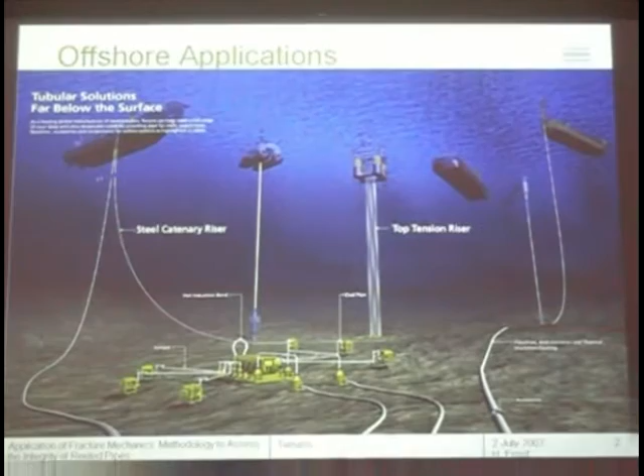I don't want to give you a crash course on petroleum engineering, but maybe for some of you this is something you've seen before. These are not birds, but ships floating on the surface of the ocean. This is the seabed, and basically there is oil down here that you need to bring up all the way to the surface. Sometimes you have a distance of about 2,000 meters, so you have to bring down all kinds of line pipes.

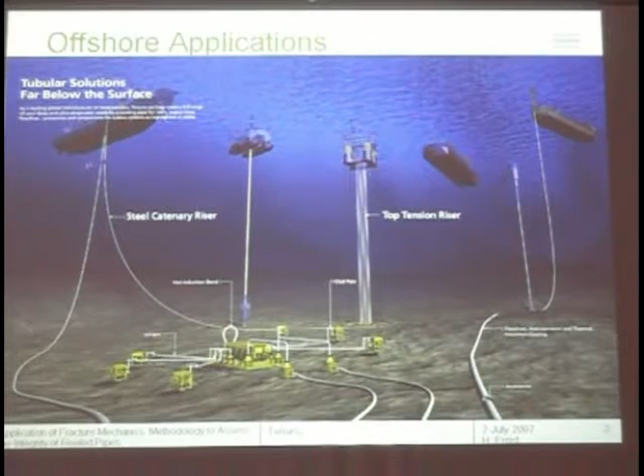One of the ways to do that is to use the so-called reeling process of installation. In this way, pipes are welded onshore, reeled onto a drum placed in a reel ship, reeled off, aligned, and straightened at the installation place, and of course we see severe plastic deformation and multiple reeling cycles.

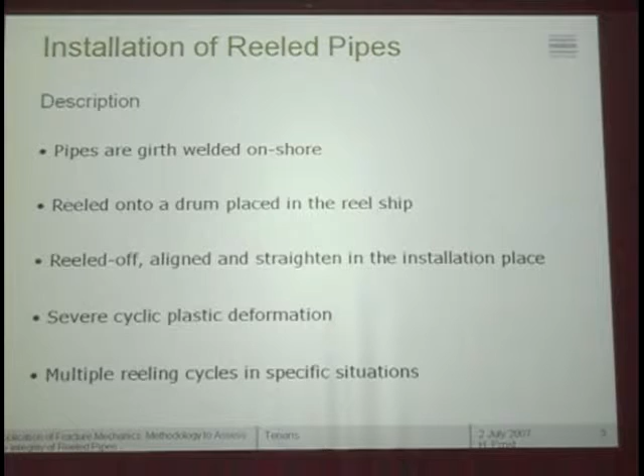Just to give you a very brief sketch here, this is the ship, this is the drum. You put the welded pipes inside this drum, which is about 16 meters in diameter, and then when you are at sea already, you derail or dereel the pipe, straighten it a bit, go through this other wheel, and then straighten it and make the pipe go into the ocean.

The reason why we develop this technology to weld the pipe and put it around a drum like this, which is not very easy to imagine unless you've seen it, is a very simple thing. The other way to do that is to take all the pipes inside your ship, have a vertical tower, and put one pipe after the next, welding them one after the other about 200 times to get to the bottom of the ocean.

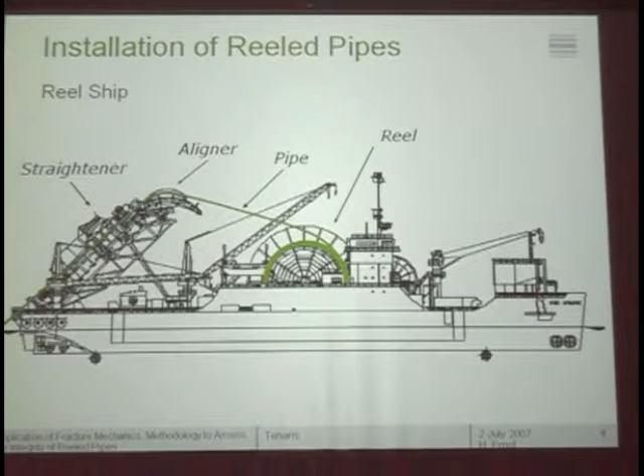One little problem is the rental of this ship is about 400,000 euros a day. So anything you have to do to speed this up is very important. Because of that, people do all the operations I just mentioned of reeling these pipes.

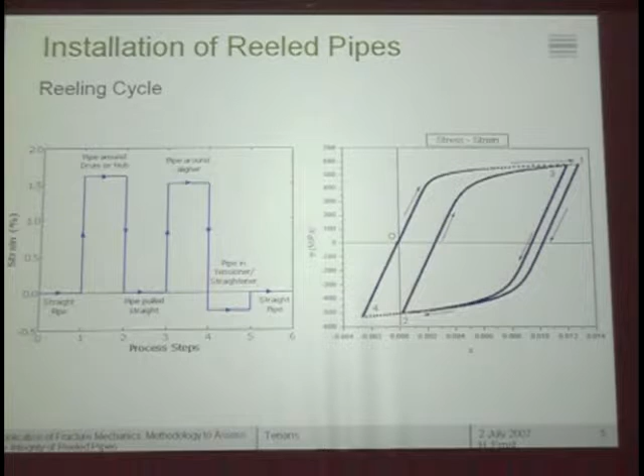If you look at the little element on the pipe, the longitudinal strain that little piece of material will see is, say, 0 first. When you put the pipe around the drum, you have a deformation of about 1.5 to 2%. Down to 0 again, you pull the pipe straight, go up to the second wheel, the aligner as we call it, a little less than 1.5, come down to about minus 0.1 or so to have the pipe finally straight again. If you look at the stress-strain curve of this, it will go from 0 to point 1, then to point 2, then point 3, and then point 4. So basically we are seeing 2 deformation cycles under normal operations that the material has to see.

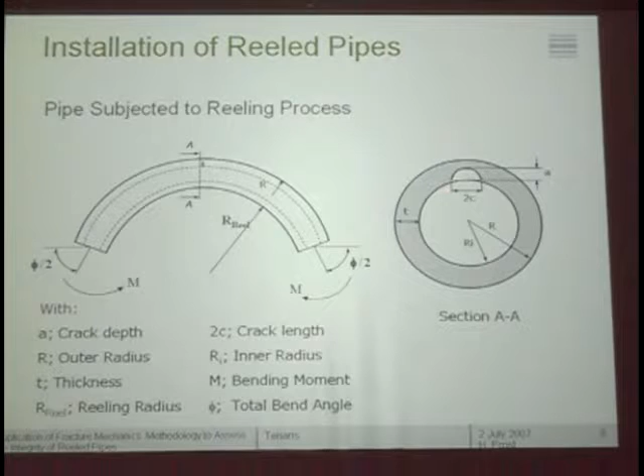Well, this is just a sketch, just to know where we are. This is the pipe, of course, and this is a defect that we will have to introduce there, of depth A and total length on the surface 2C.

So the problem that we have to resolve is: given the pipe geometry (radius, thickness, and so on), material properties, and a specific deformation history including several cycles - I repeat several because I showed you just 2, but there is a so-called contingency installation procedure. That is, if you already have the pipe in the ocean, maybe there are some bad weather conditions, so you have to retrieve the line through the 2 wheels back again, which puts not just 2 deformation cycles, but several - not that many, say about 10 to 12, no more than that, but still much more than 2. Basically, this is the problem.

That's it. What we need to do is simply predict the crack extension that you will see for a given defect size, and from there determine the maximum tolerable defect size.

Of course, we have to give some sensitivity of the answer to material variability. And as I said, we must answer this in some way, to do the best we can to come up with the maximum tolerable defect size.

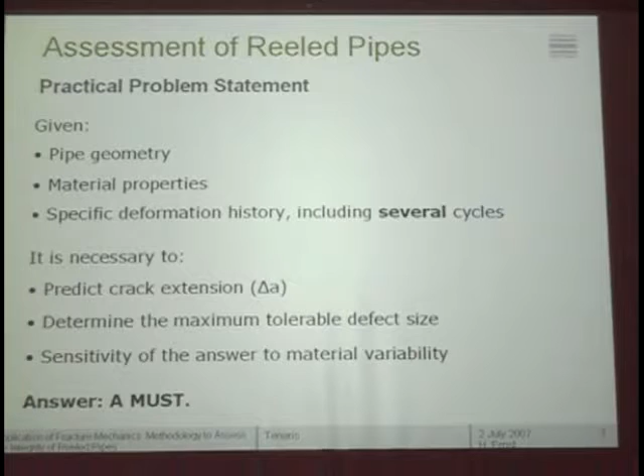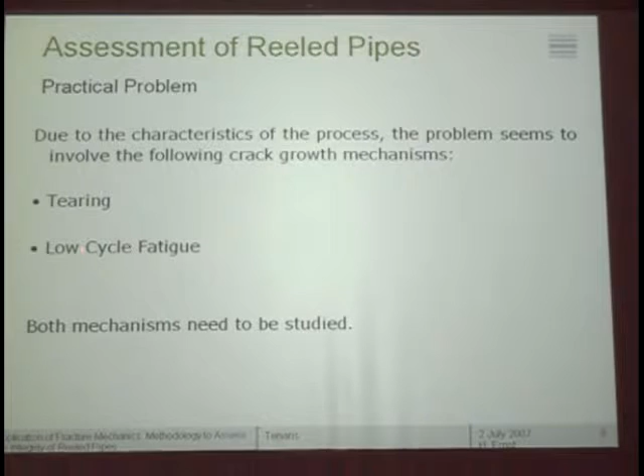This is what I'm going to show you. This is work we have been doing for some years now, and of course some other investigators are on the same problem. Basically, looking at the problem, there are two aspects that need to be considered. You will have some elastic plastic crack extension, and you also have low cycle or ultra low cycle fatigue, and you have to see a combination of both. Both mechanisms need to be studied.

Well, just to start very slowly, one sentence that you see very often in the literature, which we believe is a little misleading and mistreated and misused sometimes, and needs careful consideration, is this: the effect of previous strain history on toughness.

This is what we mean by that. We must differentiate between deforming a body, introducing a crack, and then determining the fracture toughness, which is what you usually find in the literature, from what is happening here, which is something different. That is, if you have a crack from the beginning, impose a certain deformation, and then another cycle of deformation, and see how the toughness evolves with the previous deformation. So it's not the same, and that means that many of the literature results you can find are not really applicable to this problem.

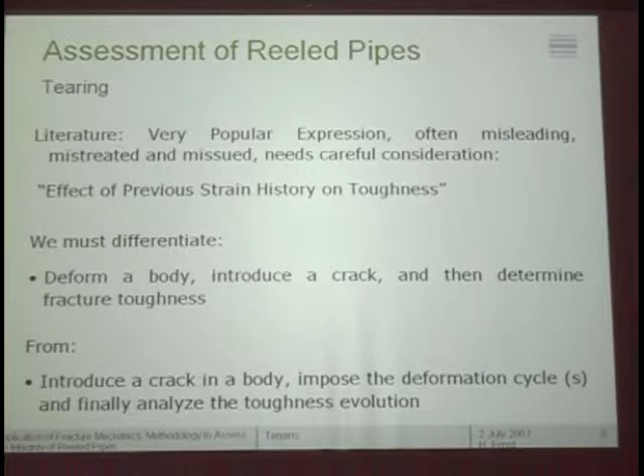The problem we need to address is the obvious fact that the stress-strain relationship is not unique in the sense of unloading. The applied fracture mechanics parameters are not clearly defined. Of course, the J integral, the applied side of J, loses its meaning, as we all know, for unloading cases. And in some way, both the applied J and some kind of applied CTOD, delta appl, are not clearly defined in the sense of the applied side for calculation purposes.

That is, if you have J as a function of crack length and load, or J as a function of crack length and displacement, they both must agree. In this case, since the load-displacement or stress-strain characteristic is not clearly defined, because it's not unique, then you cannot use the regular equations to do that.

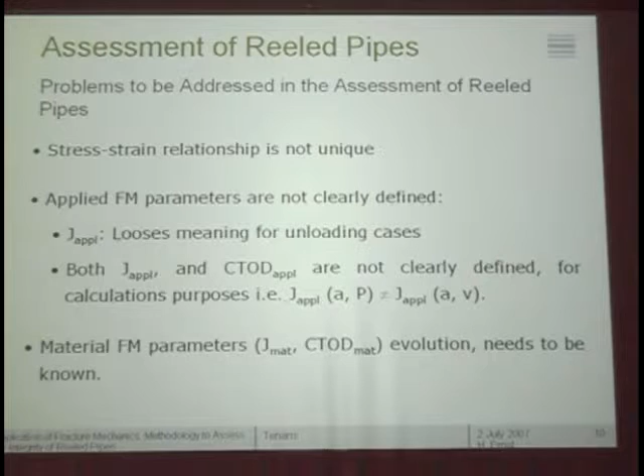Of course, we also need to see how the material resistance curve, which we call material fracture mechanics, J or CTOD versus delta A, evolves. That needs to be known, as I said again, instead of the sentence that I mentioned before.

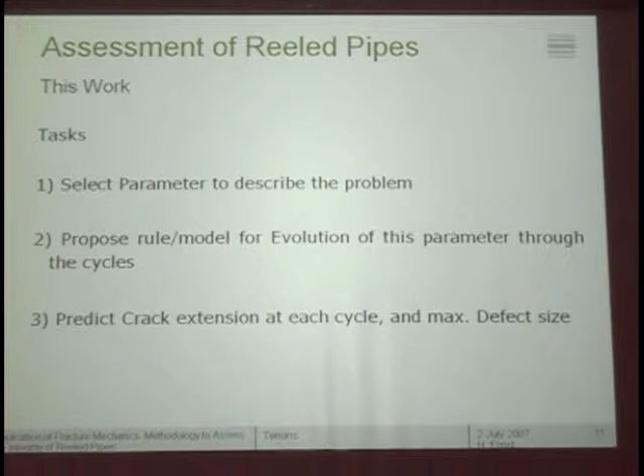The task then that we need to go through is basically to select a parameter to describe the problem, propose a rule or model for the evolution of these parameters through the cycles, and then predict the crack extension at each cycle and determine the maximum defect size.

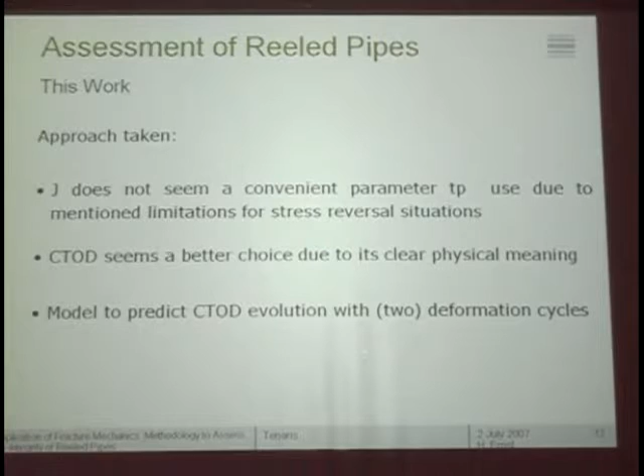In this approach, we feel that J does not seem very convenient because of the limitations we discussed. So we are focusing on what we call a CTOD approach, because it seems to be a better choice due to its clear physical meaning upon unloading criteria. So at least we need a model to predict the evolution of the CTOD with deformation cycles, in principle, but we will see how we can add several steps to this.

In order to do that, we went back to the literature, and of course, who else? We found some very old paper by Rice, 1967, where it was basically proposed that you can do something with the unloading for a specific material constitutive equation, the kinematic hardening approach.

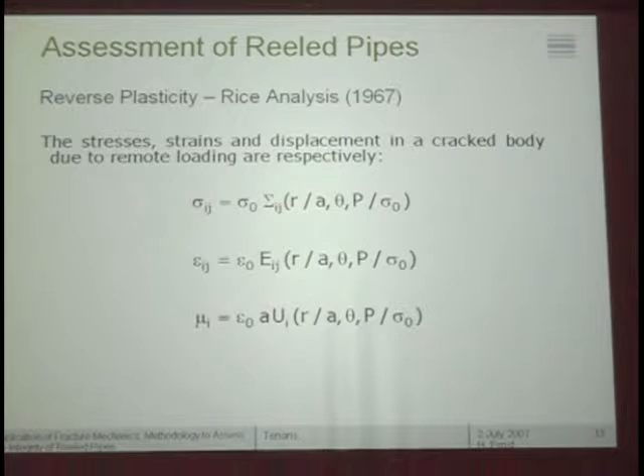If you have around the crack tip stresses, strains, and displacement given by some functional dependence like this, sigma 0 and some function of R, distance over A, angle, load, and yield, and so on for the rest, he proposed that if we were to unload from some load A to a load B, we will see then that the sigmas will be decreased by delta sigma, the epsilon by delta epsilon, the displacement mu by delta mu, in a way that the functional dependence will be the same as before, except that you should replace the loads by delta loads everywhere. Also, if we are using this kinematic hardening, the simple rule of multiplying mu by 2 will do.

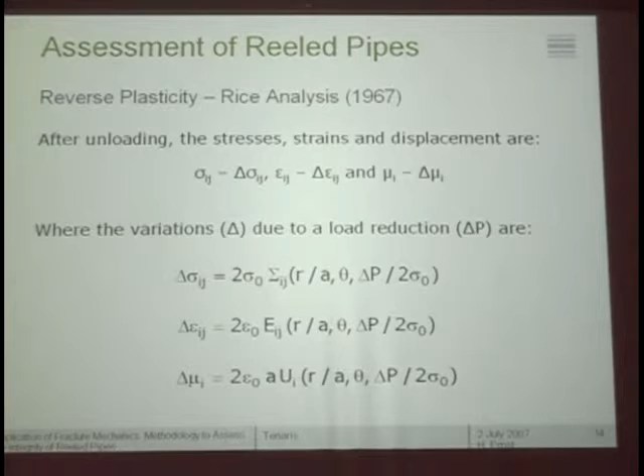So with that, you are able to calculate the stresses, strains, and displacement after unloading. And of course, one particular displacement we are interested in is the CTOD itself, which can be seen as mu2, taken at R equals CTOD over 2.

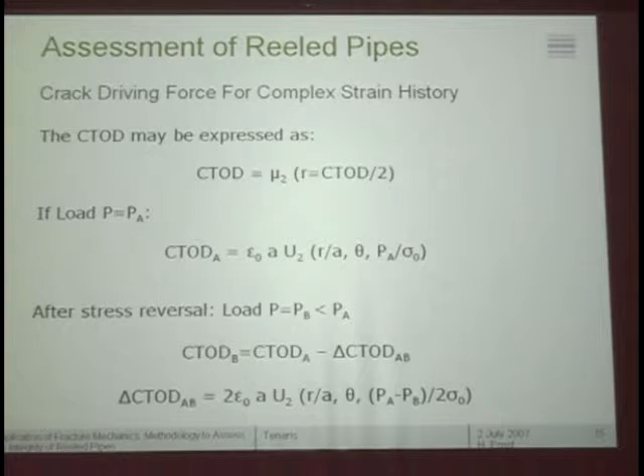So with that, what we say is that if we have a CTOD at load A, given by this type of relationship, when we go after stress reversal from a load A to a load B lower than A, it's very simple to calculate the CTOD at that point by taking the CTOD at A and reducing it by this amount delta CTOD going from A to B, which is given by this relationship.

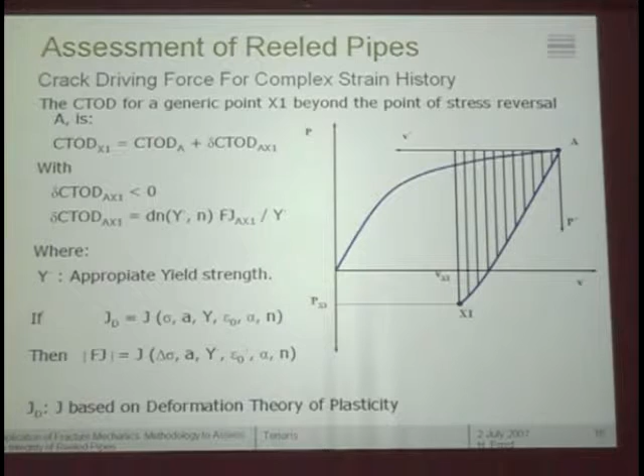If you're basing your CTOD on a J type of formula, you simply need to calculate the area here, and that will give you a J, which is not quite a J, but you can translate that to the CTOD on a regular basis. Let me explain in more detail, but this is basically the same.

And then, of course, if we reload, we do the same thing again. For the CTOD at point x2, you will have to have the CTOD at point B and add the difference, the delta CTOD going from B to X2, and you repeat the same operation.

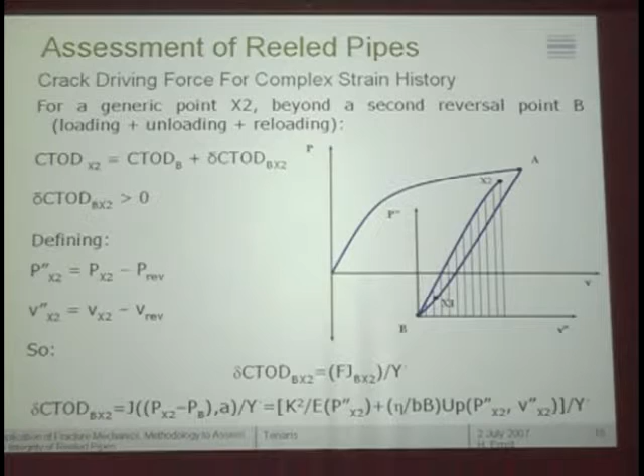So with this very simple model, we thought we were in a position to predict this evolution of the CTOD to a practical extent, of course. To prove if we were right, or close to, or right enough for this purpose, we did some experimental work to determine the evolution of the crack driving force, no crack growth so far, under complex strain history. We took a particular material, one of the ones we use for this operation.

The tube is 355.4 by 22.2 millimeters. The yield is 476 megapascal, the tensile is 565, elongation about 33%. And the weld metal - remember this is a weld piece - 552, 672, and 32 about.

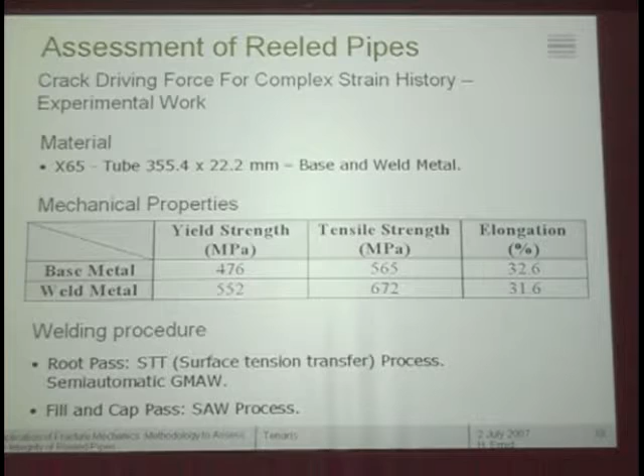These are some details of the welding procedure. I don't want to go too much into detail because we have a lot to cover. What we did is use the very commonly used single-edge notch tension specimens recommended by the standards for this type of thing. The reason is it simulates, or supposedly simulates, the constraint - there was some question about constraint before. It's believed that the single-edge notch tension specimen simulates the Q factor, if you want to use two-factor fracture mechanics approach. It simulates pretty decently the behavior of the pipe, the pipe in bending.

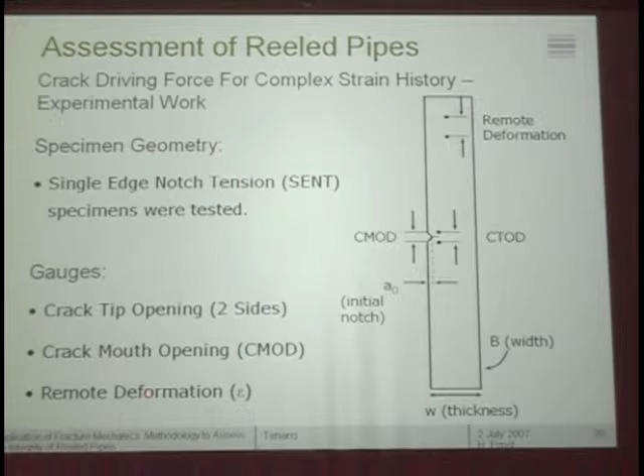So this is the same specimen. We measure the CMOD there, we measure a CTOD that is very close to delta 5 because we actually measure the distance between two points from both sides, and of course we also measure the remote deformation.

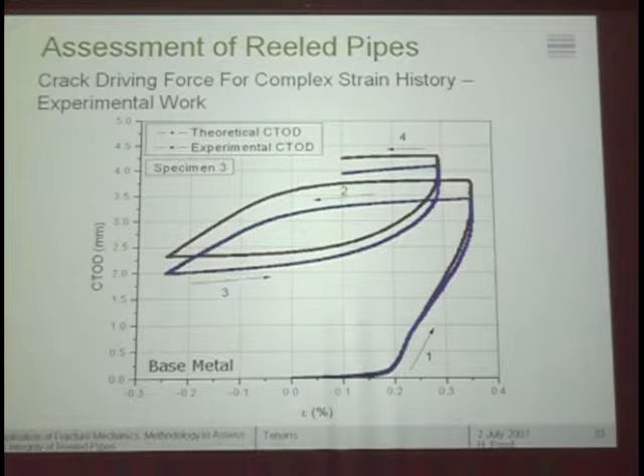So now, applying the model I just mentioned, this is the type of agreement we have. In blue, as shown before, experimental results. In red, this model we just presented. The difference is there, but it's not so bad. In fact, we are pretty happy, particularly given the problem I mentioned before. In both cases, there is some extra elongation in terms of CTOD that should not be there, so we feel pretty comfortable with this type of agreement.

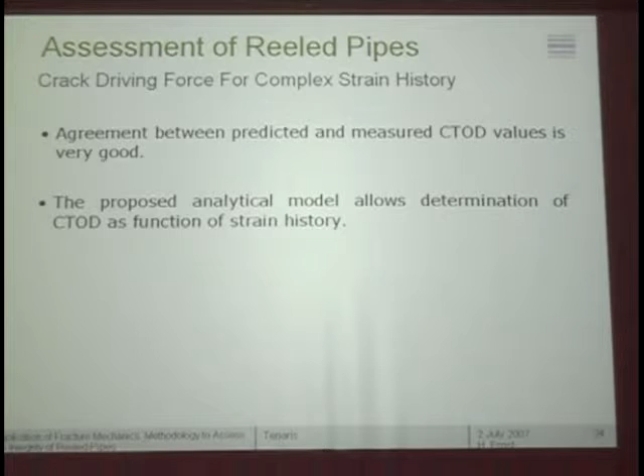We want to say that agreement between the predicted and measured CTOD values is decent or very good. That allows us to continue to the second part of this, because so far the only thing we have done is see the evolution of the applied CTOD. We have not said anything yet about how the crack grows in the first cycle or the second cycle.

To do that, the other thing we need to do is take a look at the resistance curve evolution. We see there are two extreme cases. One, if you want, is the history-independent resistance curve. This is the one people have been using in the past, since they have not done all this.

They basically said: if I have one cycle, I apply the R curve concept and determine how much the crack grows at the end of that cycle, the maximum of that cycle. If I unload and come back up again, I forget completely what happened in the first cycle, I move the resistance curve to the new origin, because the crack is a little longer, and reapply the same process again. So I'm shifting the resistance curve every time, forgetting completely what happened before. That's why I call it history-independent resistance curve.

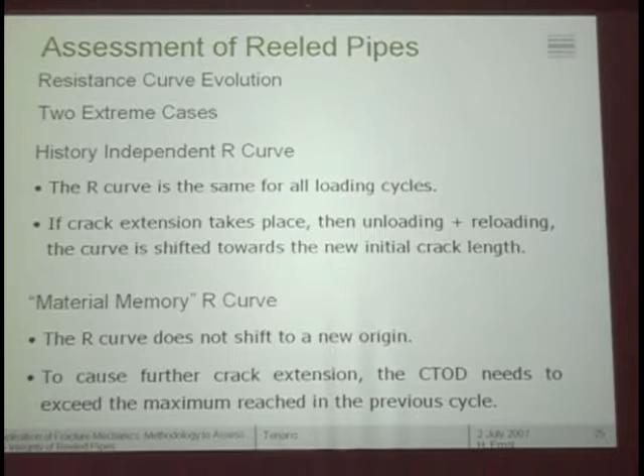That's one extreme case. The other one we can select is what we call material memory resistance curve. That is basically the opposite: the R curve does not shift to the new origin. So if you have one cycle, you have some growth, you come down in load, and you will have more extension only if you exceed the previously reached CTOD value. If you do, then you will have some crack extension, but that extension is given by the resistance curve itself, plotted from the very first origin.

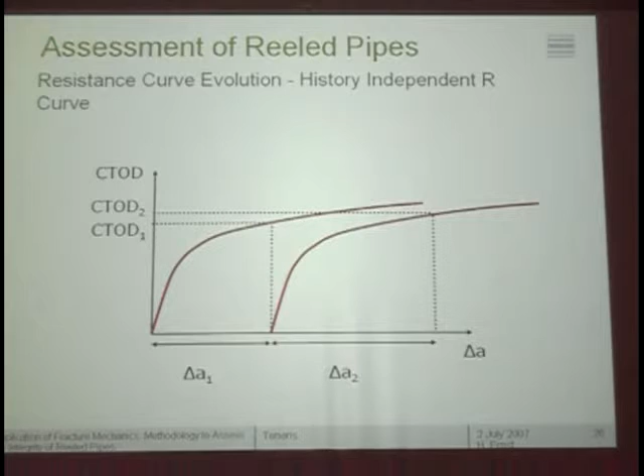I'm trying to show you this now. This is the first of the two cases, the history-independent curve. You have the applied CTOD, and this is the resistance curve. From there you can read off how much delta A1 you have for the first cycle. You unload, you come up again. If you go to CTOD 2, you will have this much crack extension. So you are adding crack extensions as if you didn't have anything before.

Whereas the material memory resistance curve is somehow like plasticity, in the sense that you have to get to the same value you were at before you can extend the envelope. So you go to some CTOD, you have the same crack extension as before, but when you unload and go to a second CTOD, the extension you get is only this much. This is the same as saying that if you have a second cycle where the CTOD is bigger than the first one, you can forget the first cycle completely, and the total crack extension is given by the maximum CTOD of the two.

We also ran an experimental program to determine this. This is a somewhat busy slide, but bear with me and we'll go over it, hopefully successfully.

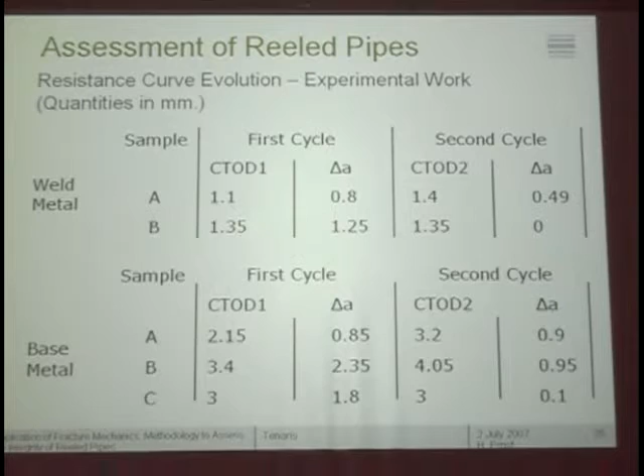Let's look at this one here first, weld metal. I'm going to show you just two samples, although we ran more than that, A and B. Let's look at A. In the first cycle we got to a CTOD of 1.1, all quantities are in millimeters, and the delta A was 0.8 for that. In the second cycle we went to 1.4, and the crack extension for that cycle was 0.49. For example B, you can see these numbers here. You can complete the table for the rest, but I prefer to show you the slide.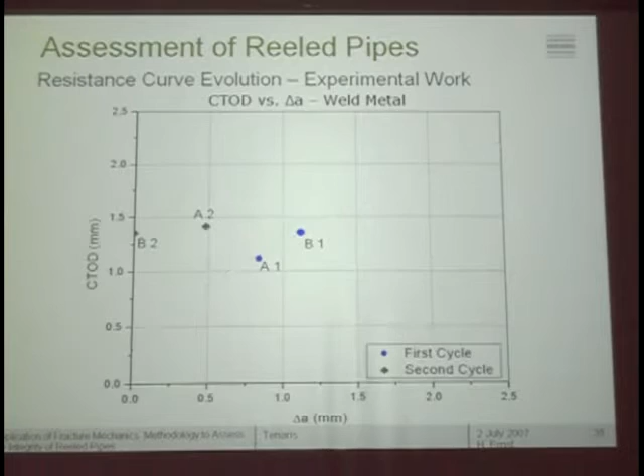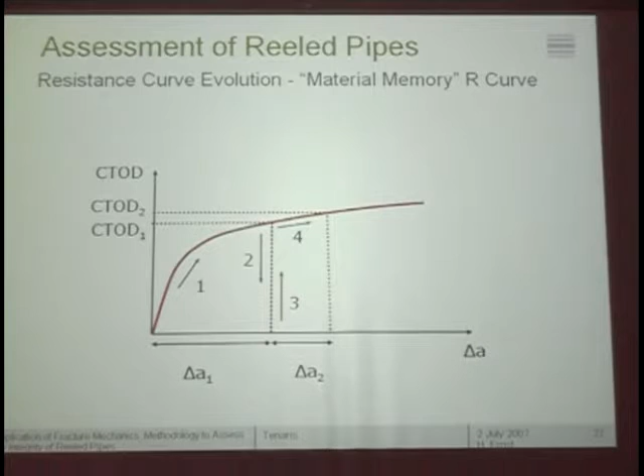In other words, as I said before, what we are doing here is precisely that. We are showing experimentally that this is what happens. If you have one CTOD at one level, you have some crack extension, you put another CTOD second cycle, the amount of crack extension is only this much. If I were to plot this much with this CTOD, I will have a point like here. But if I add the two together, I will put it on top of the resistance curve. So in other words, I can use the resistance curve with these rules to see how much crack extension I get in the first and second cycle.

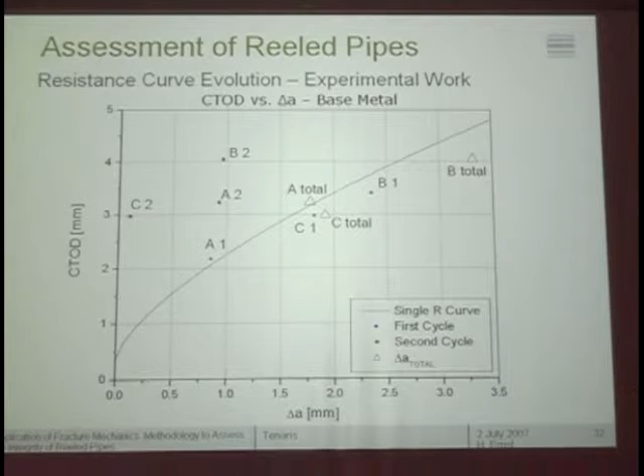The same thing goes for the other material. It's a little busy, but basically it's the same. When I put everything in terms of the total crack extension, in the three cases, you get pretty much an agreement with the points and the curve.

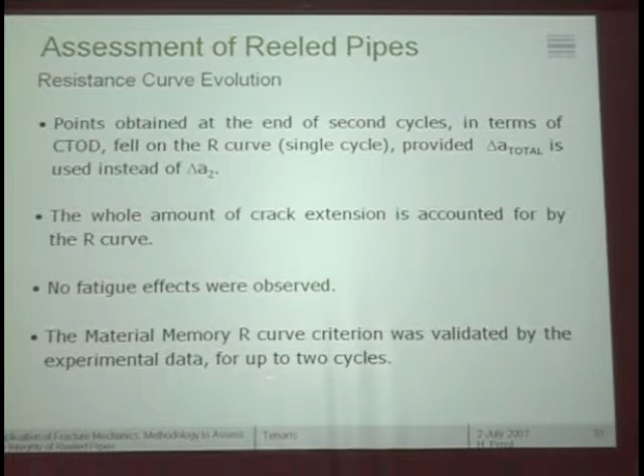So, in short, regarding the resistance curve evolution, points obtained at the end of the second cycle in terms of the CTOD fell on the resistance curve, provided the total delta A is used instead of delta A2. The whole amount of crack extension is accounted for by the resistance curve. Only two cycles, please remember that. No fatigue effects were observed. Again, only two cycles, okay? Obviously, if we put more cycles, sooner or later the fatigue will come in. The material memory resistance curve criterion was validated by the experimental data for up to 2 cycles for this material.

Now, multiple loading cycles. As I said, contingency, installation conditions, weather, etc., may require that the line be retrieved and reinstalled. So imagine we put the pipe to the higher deformation and then release it to the second, smaller cycle. But if we have to retrieve it, we have the line going again through the smaller deformation, the larger deformation, and then when we start it again, another smaller deformation. So we go from 2 to now 5 cycles, 5 deformation cycles, and if we repeat that, we keep on adding 3 each time. So we can have a pretty complicated history of deformation cycles, so about 10 or 12 is not very uncommon. In this case then, what we need to do is to include the fatigue part.

So what we are going to do is simply follow the idea that some other people also use, a model that combines the tearing and fatigue formulation. And for the fatigue part, we are going to use the delta J range to calculate the crack extension due to that. Again, remember we are going to use also the idea that tearing contributes to crack extension in the first cycle only, except that if you see subsequent cycles, the crack driving force exceeds the previously reached value.

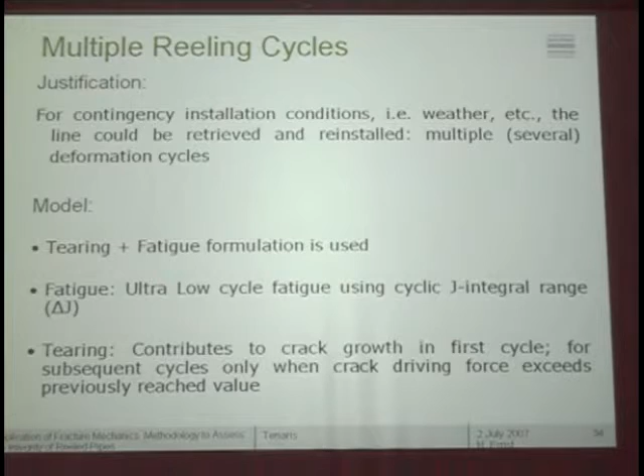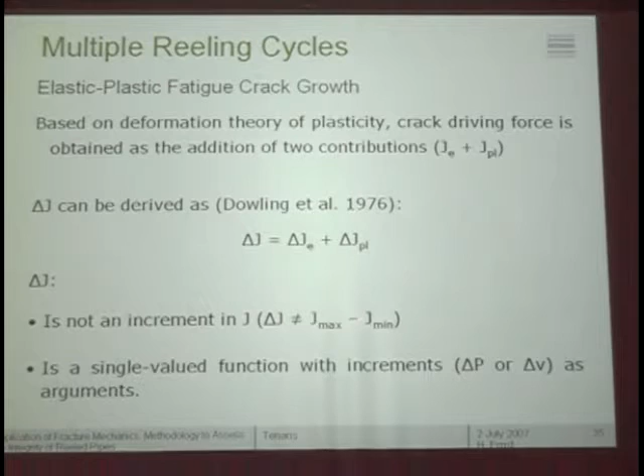Well, this is very easy and familiar for you. We are going to do delta J, proposed by Dowling and Begley many years ago. Delta J has an elastic and plastic part. It's important to realize that this is not just a difference between the two. And for the elastic part, it's easy enough to calculate, so I'm not going to take too much time here.

And if you want to use an area approach, you are familiar with this experimental way. J is usually eta over BB times the area under load displacement record, or plastic part, say, we are talking about the plastic part. So now if you have this test record going from 0 to this point, unloading, and back up again to the same point, the delta J is related now to delta P, delta v, which means basically it has to be associated with this whole area over here.

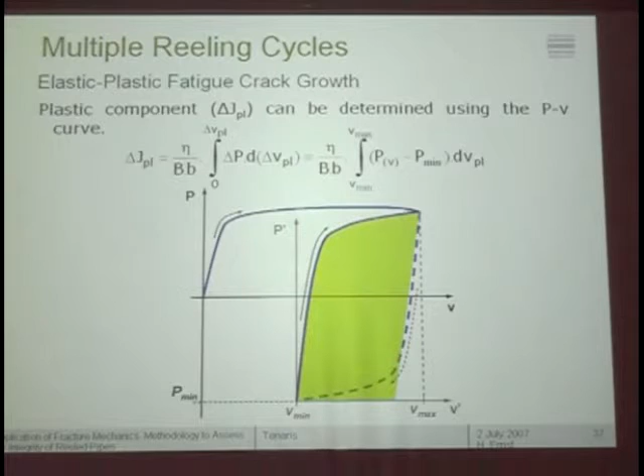And basically we sort of use the same idea of the Paris fatigue law, except that we alter a little bit the constants to have it in terms of delta J instead of delta K.

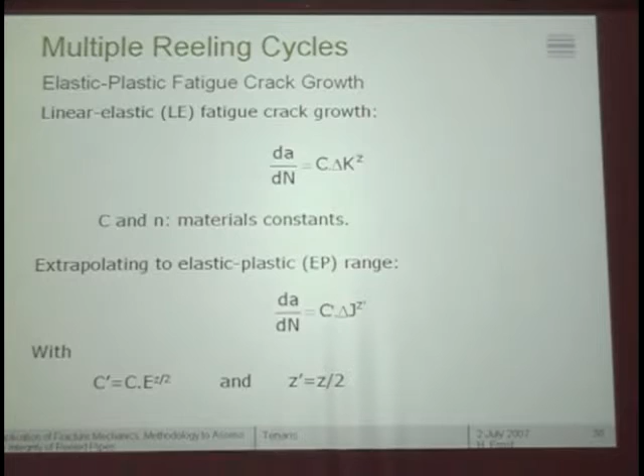We also are using the closure effect, probably known to everybody. During part of the loading cycle, the crack surfaces come into contact, and the crack is considered closed in this stage. Of course there is a difference between opening and closure, but let's simplify it. The effective load range, delta P effective, is P max minus P opening, and this is what we use instead of the nominal one.

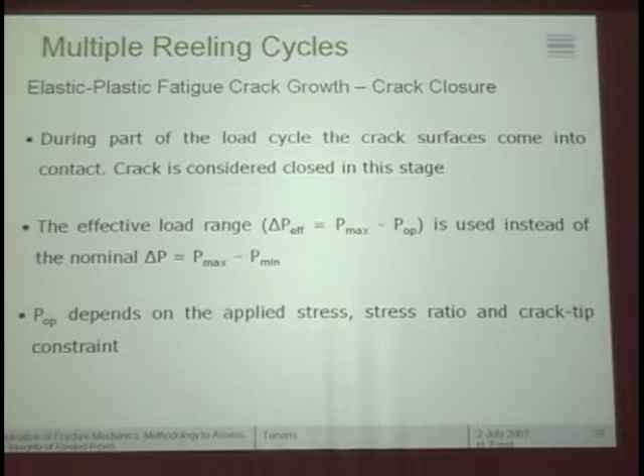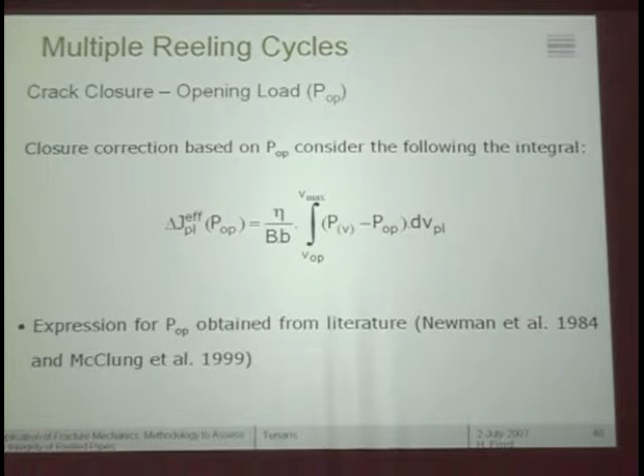We simply obtain these formulas for P opening from the literature, which I will mention. The delta J plastic effective is obtained by integrating between the load and P opening, and of course the dV plastic. This is the literature we got it from, Newman and McClung.

So the load displacement record is modified now, same as you saw before, except now you have the P opening someplace, and this is the area that you should consider.

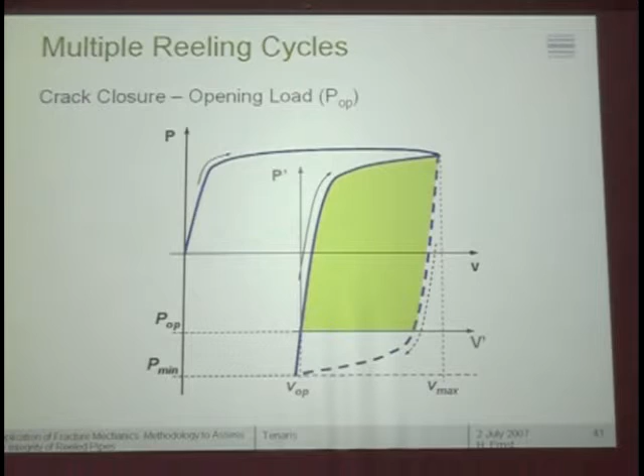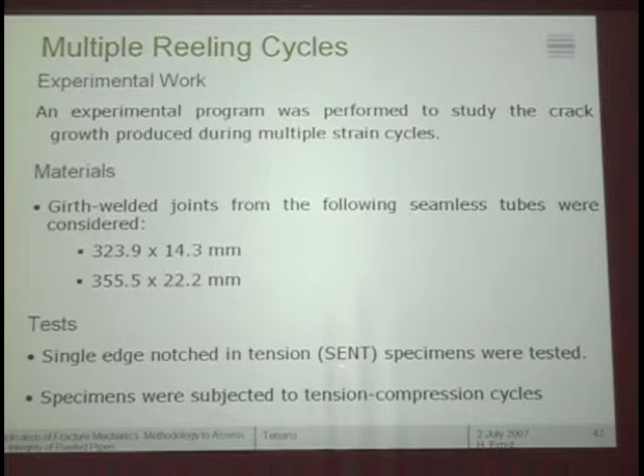We ran again some experimental program to see this part. The material is pretty much the same as before. The test used the same type of specimens as the standard recommends, single edge notch in tension, and the specimens were subjected to tension and compression cycles.

This is the real thing, not based on the deformation theory. If you believe the deformation theory, even when unloading, the delta CTOD would be much larger.

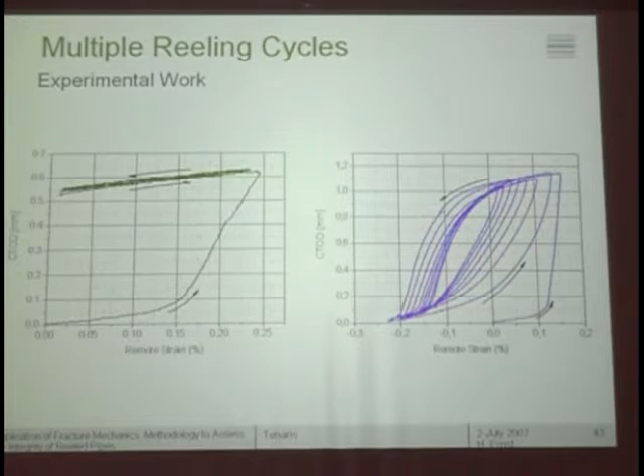We took a bold approach. Basically, after doing all these cycles, we measured the total amount of crack extension. We subtracted from this delta A total the amount we obtained from tearing, that is from the resistance curve, and the difference between the two we call delta A fatigue, because we are considering the linear addition of these two models. It is simplistic, but it's the best we could do at this moment.

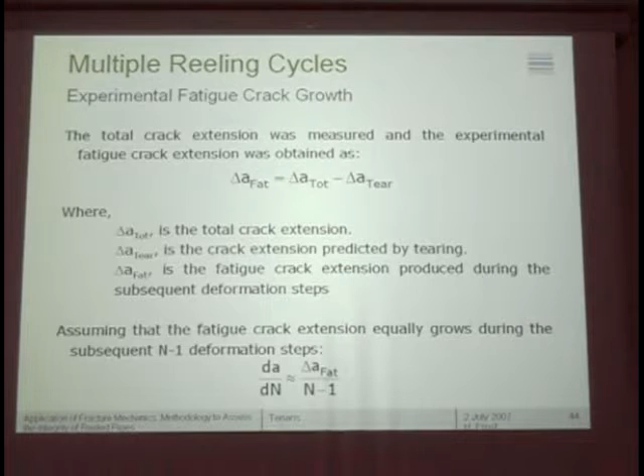After we had this delta A coming from fatigue, we divide that by n minus 1, number of cycles minus 1. We decided the first one is only tearing, and the others contribute with fatigue—although I said before that even with 2 cycles you didn't see fatigue, but just for the sake of conservatism, we put that cycle in there too.

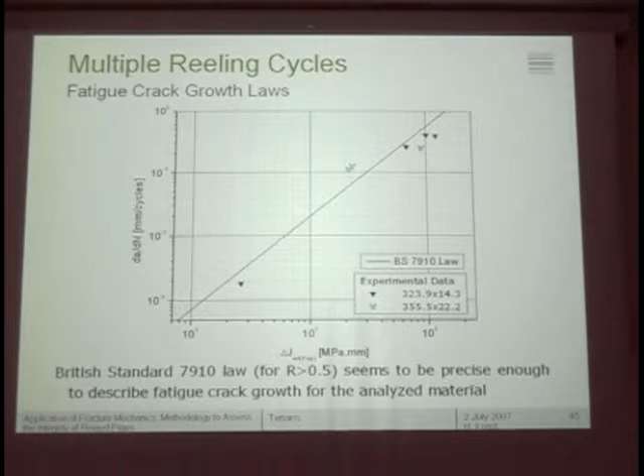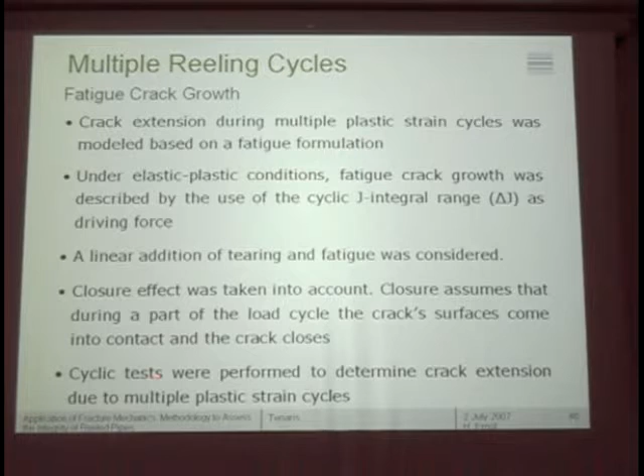So, crack extension during multiple plastic strain cycles was modeled based on fatigue formulation, and the elastic-plastic fatigue crack growth was described using cyclic J—J effective, as we say. Linear addition of tearing and fatigue was considered, closure effects were taken into account, and cyclic tests were performed to determine crack extension due to multiple strain cycles.

Now we have a model that presumably can give the total crack extension with tearing and an arbitrary small number of cycles, say no more than 10. The last thing I mentioned in this program is to give some sensitivity of the material variability. So what we did was run a full probabilistic fracture mechanics approach with everything that I said before.

The deterministic approach, as you very well know, is performed for single value parameters. If I give you the material properties, the geometry of the pipe, the cycles, the history, and so on, you should be able to tell me with this model how much crack extension you have.

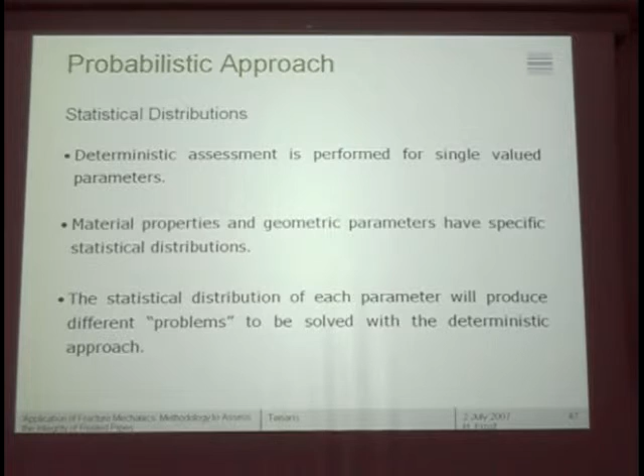Except that each of these parameters that I give you, material parameters, do have a statistical distribution, not just a single value. So material properties and geometry parameters have specific statistical distributions, and this needs to be addressed in some way. Not solved, but giving some idea of the influence.

So what we did is develop a method based on fracture mechanics and Monte Carlo simulations, using as input the statistical distribution of these parameters, typically a 2-parameter Weibull distribution for each of these.

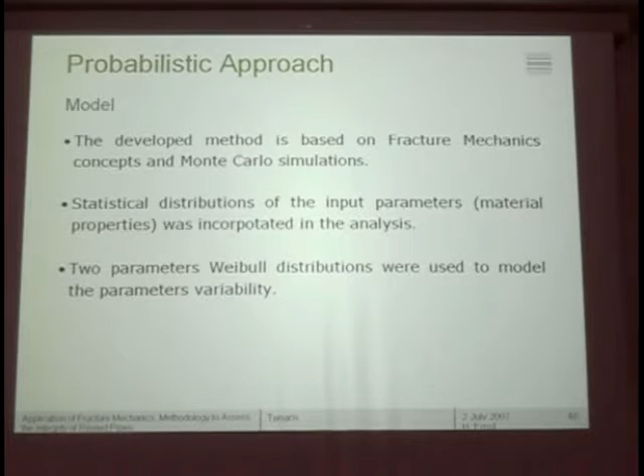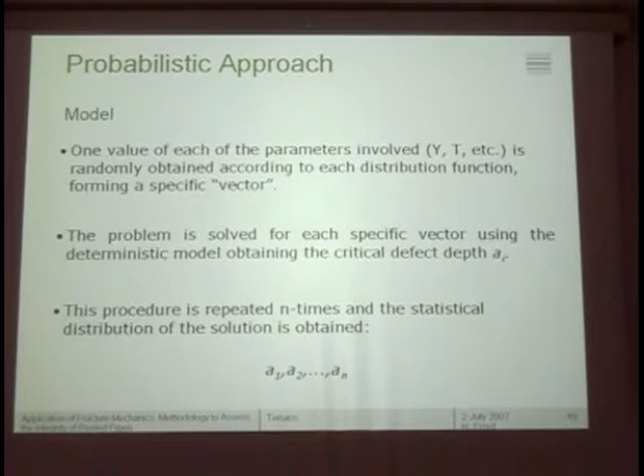Basically what we do is pretty obvious: we include all the statistics. We sort of throw the dice, if you like to say, and with that we come up with a vector, and the problem is solved for each specific vector using a deterministic model. Then you repeat that 10,000 times, or however many cases you have patience to wait for, and you solve the problem that many times.

Just to remind you, what we are doing is using the material resistance curve. I go back to J, but of course we can put that in terms of CTOD using the standards, which means you can fit your experimental data with 3 parameters, M, L, and X. Sometimes you use only 2, depends on what you want, but you can do both.

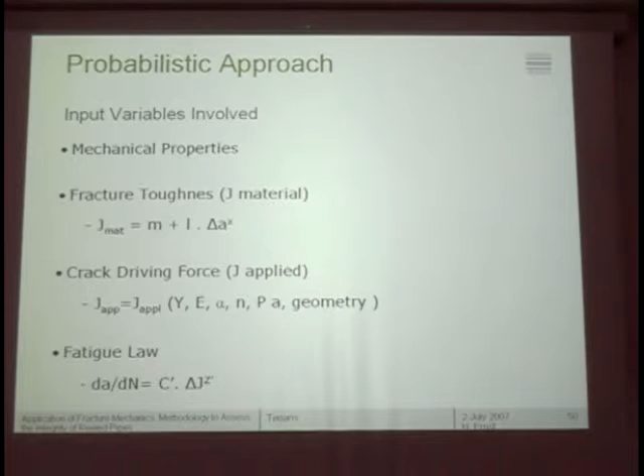The crack driving force, or CTOD, is proportional to the yield, the Young's modulus, the parameters alpha, n, and so on, the load, the geometry, and so on, and the fatigue law, 2 constants. So here, the input variables for the statistical model are the 3 parameters M, L, and X from the material R curve.

The 3 for the tensile behavior of the material, the Ramberg-Osgood equation parameters Y, N, and alpha, and we are taking as an example C prime, which is the constant from the fatigue law. We are keeping the exponent fixed.

There are some equations that can give you the Ramberg-Osgood exponent, connecting it and alpha with the yield and tensile strength, which is typically what you get from the mill. The plant gives you pairs of yield and tensile strength, that's what they usually have, and they have not run for each case the complete load stress-strain curve.

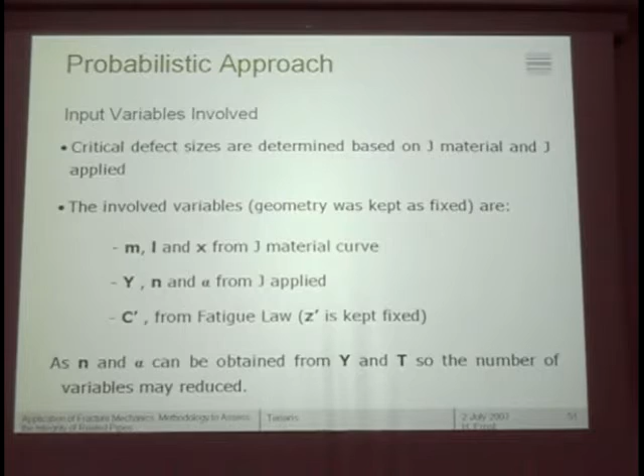So with all that, the output of the model should be critical initial defect size distribution, final defect size distribution, amount of crack extension, and if you want, the cumulative probability of failure, defined as the probability of failure of a given defect size, assuming that defect is there. If I have a defect so big, I'd like to know, due to the variability of the parameters, what is the probability that this defect fails.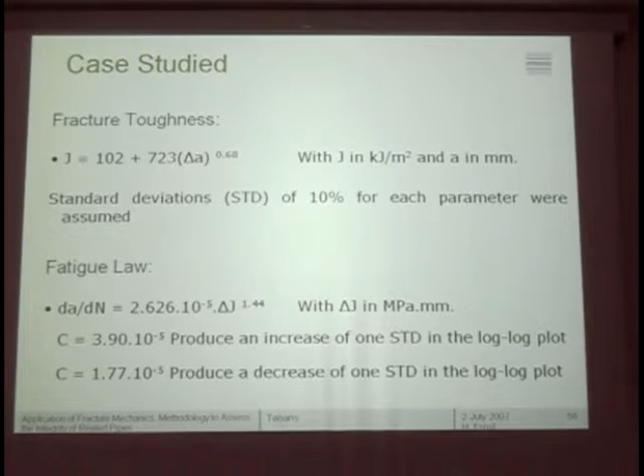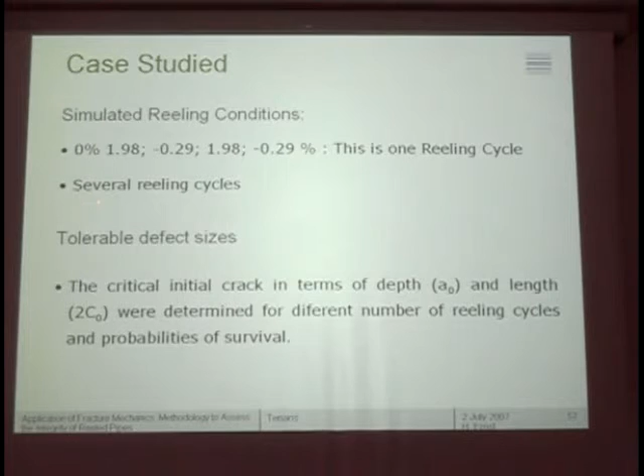The same thing applies for the fatigue law. So with all that, we simulated reeling conditions of 0, about 2%, minus 0.3, 2%, minus 0.3. This is what some people call one reeling cycle, composed of two deformation cycles, and of course there's the possibility of running several reeling cycles as well.

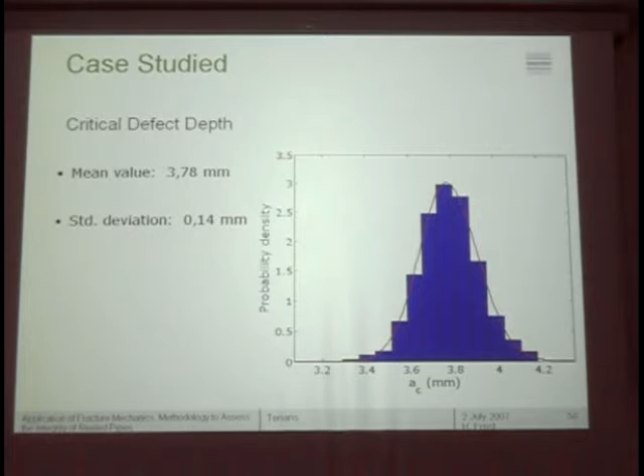As you will see, this is the result of all that. This is the critical initial defect depth, and here you see the distribution that comes out of the model, with a standard deviation of 0.14 millimeters.

If you have a defect depth on the vertical axis and a defect length on the horizontal axis, these lines will give you, in this case, the 50% probability of survival for this material and this deformation history, and this other one the 95% probability. This is the combination, millimeters versus millimeters, so no J, CTOD, Paris law, delta J, anything like that.

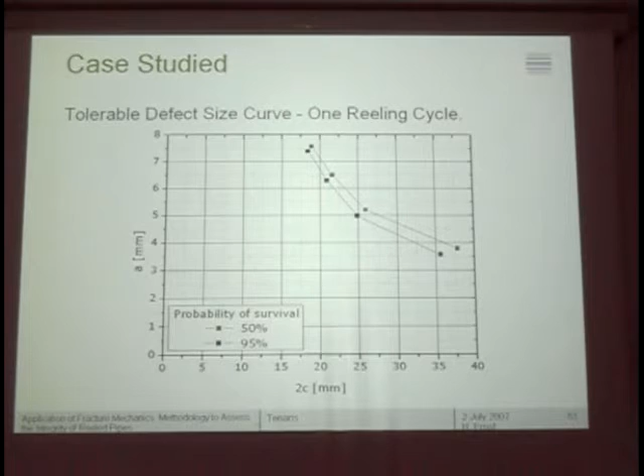In summary, for tearing, an analytical model was proposed to determine CTOD as a function of strain history. The agreement is reasonably good. The material memory seems adequate for the resistance curve. The amount of crack extension after 2 cycles seems to be completely accounted for by the resistance curve without fatigue effect.

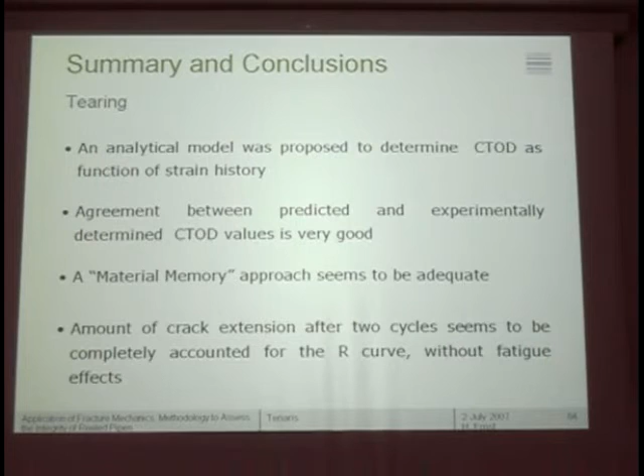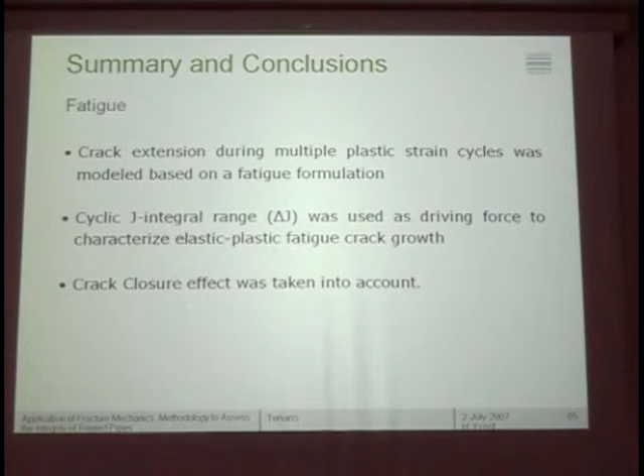If we put in more cycles, crack extension during multiple cycles was modeled based on a fatigue formulation. Delta J, or delta J effective, was used, and crack closure was taken into account. For the probabilistic part, we developed this probabilistic approach. The program input includes applied strain history, statistical distribution of material property variables, and geometry.

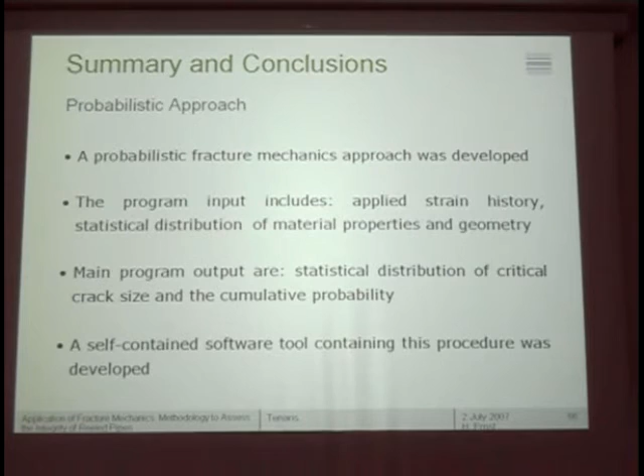I'll show this example, but you can play with the sensitivity of any of these parameters. The main program outputs are the statistical distribution of critical crack size and the cumulative probability, and a self-contained software tool containing this procedure is available.

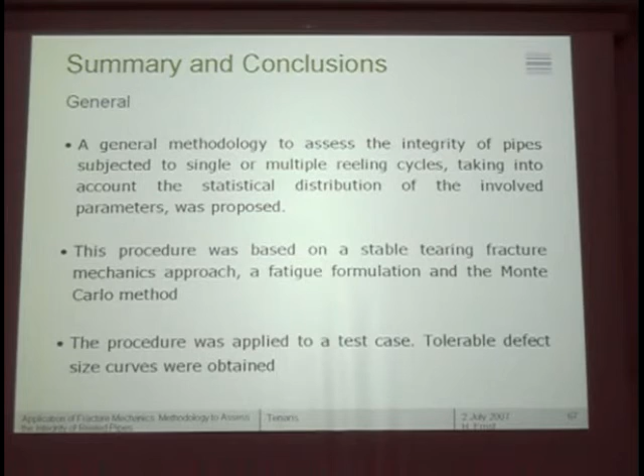I also have to say that Tenaris was part of the so-called JIP, Joint Industrial Project, where many other companies like Exxon and Total intervened, together with the Southwest Research Institute of San Antonio, where they did full-scale tests—about 30 full-scale tests of this type of defect. We're still working on putting together the data, but in principle the agreement is reasonably good with this methodology, which is pretty much shared by the Southwest people.

I have to say something about the recommendations. Of course, the main recommendation is to improve on everything. We did close the circle, the loop is tight now, but we need to improve on each and every one of the little pieces we put together here.

The model for the CTOD—we ran some examples and were pretty happy, but I'm sure you can imagine many ways of testing these two extremes, loading and unloading, etc., that may not be so good. On the resistance curve evolution, if you start including tearing with fatigue—one very high cycle and then other smaller cycles—you start getting into overload effects, which were not accounted for in this approach.

We didn't take that into account in the fatigue, nor in the resistance evolution. So fatigue with large deformation cycles, including closure, needs a bit better understanding, particularly when the cycles are so big and the amount of crack extension is also so big in these cases.

As I said, the tearing-fatigue interaction model is specifically open for improvement, including the overload effect. The linear connection, or linear addition, is probably not the best approach. When the fatigue part is very small compared to the other, in the transition, I'm sure there are better ways of improving this.

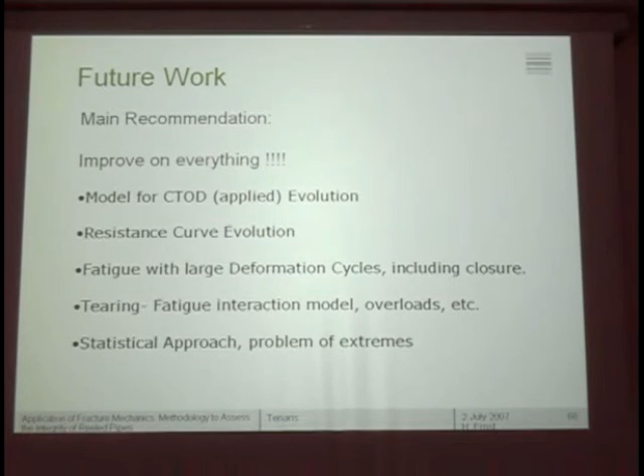And of course, the statistical approach—this is for you, my friend—there are some problems at the extremes. We're drawing conclusions about how things behave at the extremes when we don't have enough data. We're simply taking a cumulative probability based on what we see after so many trials, but we're really interested in looking at this area, not so much at that one.